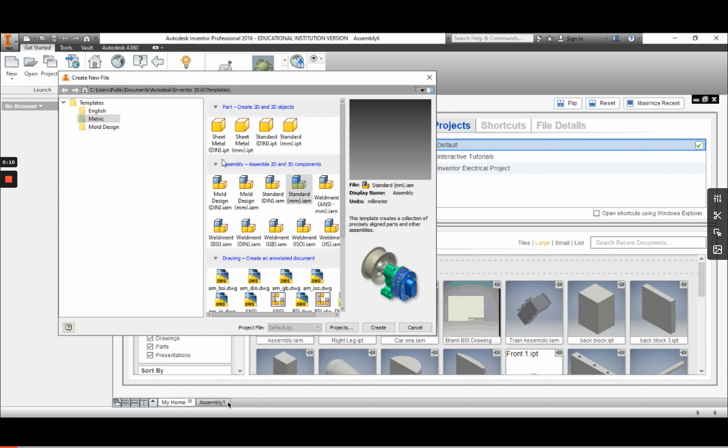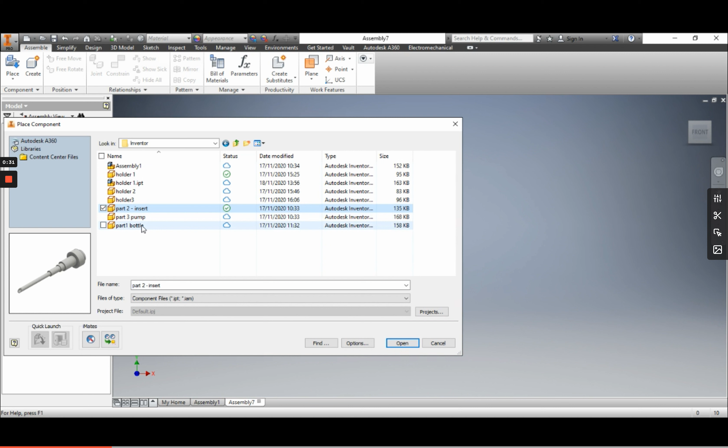I'm going to go up to New, go to Assembly and click Standard Millimeters. I'm then going to go to Place in the top corner and find all of the parts for my hand sanitizer in my OneDrive. I should have 3 parts: the bottle, the pump and the insert. I'll hold down Shift and select them all and press Open. I'll click once and then press Escape on my keyboard to avoid placing more than one.

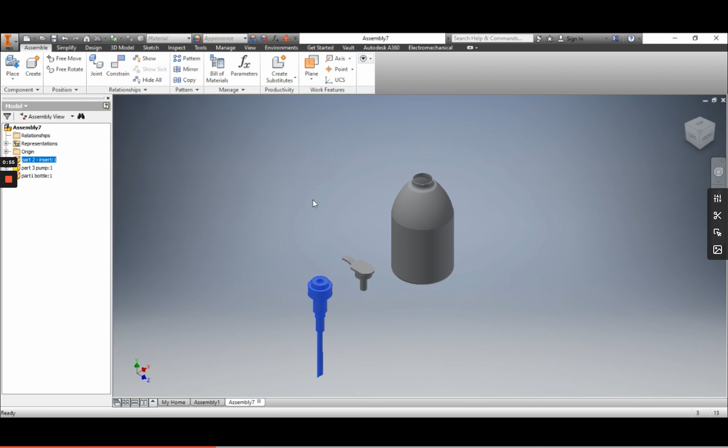Now all parts of the bottle join to the insert part. I'm going to right click the insert and make sure that grounded is turned on. I'll then click constrain and do the center of the insert to the center axis of the bottle and press OK.

I'm then dragging the bottle out so that I can zoom in and constrain the top face of the bottle. Using my view, I'm going to click that onto the insert base part of the circle.

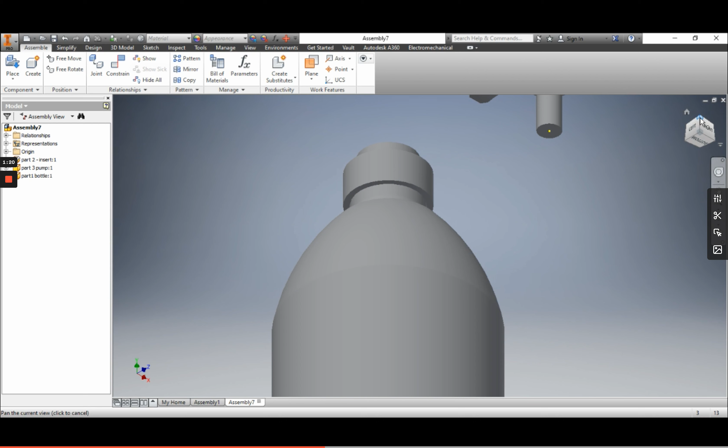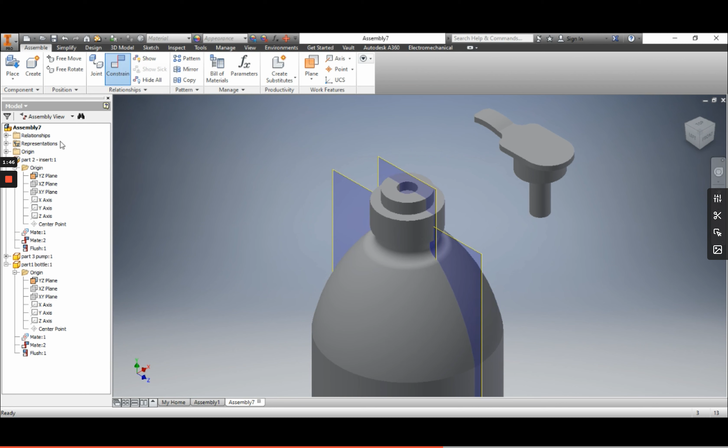This still means the bottle can spin around, so I'm going to go to my modelling tree and open up the origin folder of the bottle and the insert, and find 2 planes running down the centre of each one and turn on their visibility. I'll then click constrain, change it to align, and align both of those planes together, and that will stop the bottle from spinning.

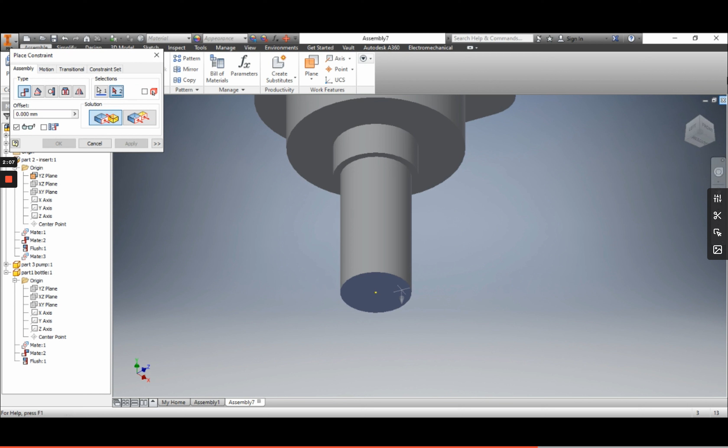I've turned off the plane for the bottle just to make it a little bit easier. Now I'm going to do the pump. I'll click constrain and do center to center and press OK. I'm then pulling the pump up and constraining the very bottom of the pump to the inside of the hole at the top of the insert, and press OK.

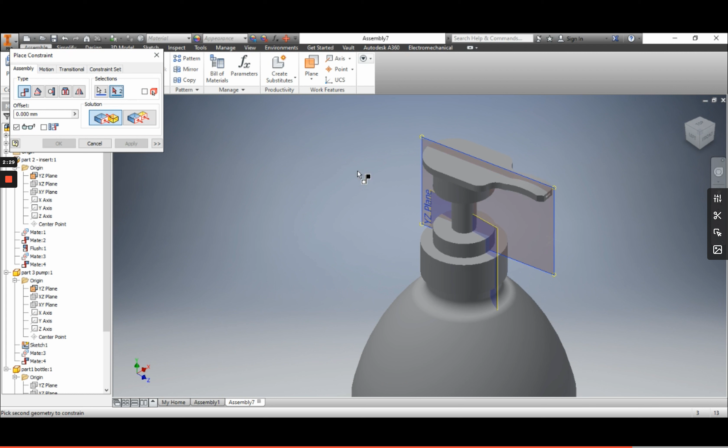Again, to avoid it spinning around, I'm going to go to my modelling tree, and in the origin folder under the pump, turn on the visibility of the plane that runs down the centre. I'll then click constrain, click one of the planes, make sure it's set to align, and select the other plane, and that will stop it spinning around.

Lastly, I'm just turning off the visibility of all of the planes I've got, and the bottle is now fully assembled. So I can go up to File, Save As, and save it into my OneDrive folder.